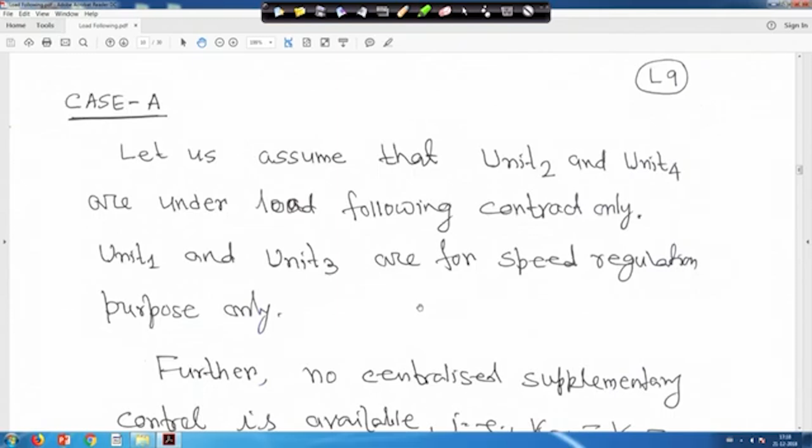So, they will not be part of AGC; that generation will actually change the contracted demand, right. And unit 1 and unit 3 are for speed regulation purpose only. That means there will be no supplementary controller, so Ki1 and Ki2 will be 0, and it will be only speed regulation, that is your delta F by R feedback coming for the governor. So, further, no centralized supplementary control is available, that is Ki1, Ki2 is 0. That is why I told you Ki1, Ki2 is 0.

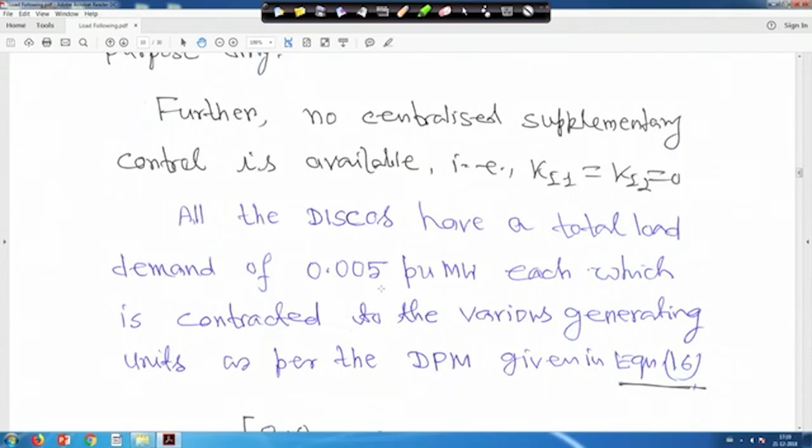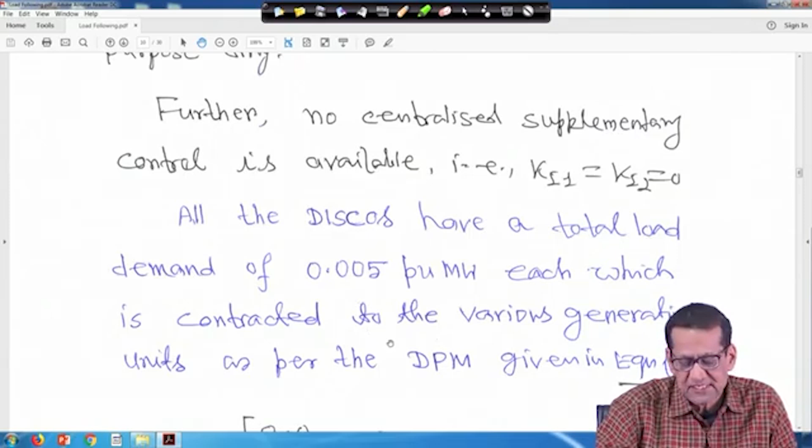So, even with 0.005 per unit megawatt for all the load demanded by DISCOs, that is DISCO 1, DISCO 2, DISCO 3 and DISCO 4, it is contracted to the various generating units as per the DPM. So, this DISCO participation matrix is considered like this. I am writing in short: distribution company means this is D1, this is D2, this is D3 and this is D4. Generation company means G1 instead of GENCOs, G2, G3 and this is G4, right.

So, unit 1 in area 1 is not taking part in load following. That is why all these elements, actually G1 is not generating, in this case it is not GENCO, it is unit 1. Let me just delete this one. This is D1, this is D2, this is D3, actually this is load following. It is unit 1, unit 2, unit 3, unit 4, right. So, these are in area 1, say A1, and these 2 units are in area 2. So, in area 1, generating unit 1 is not taking part in load following, right.

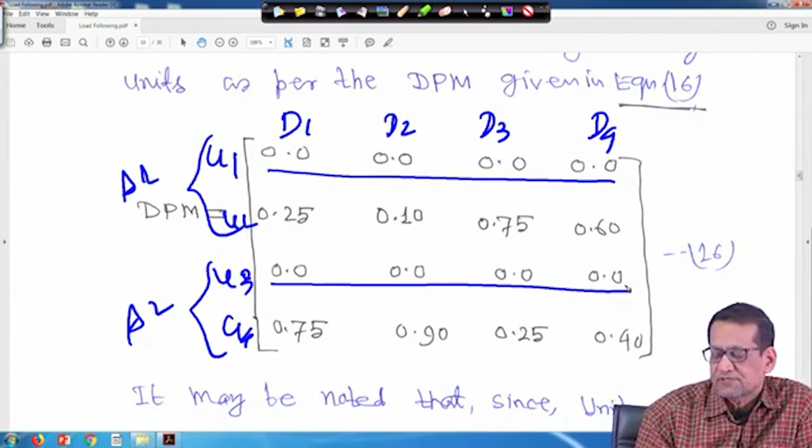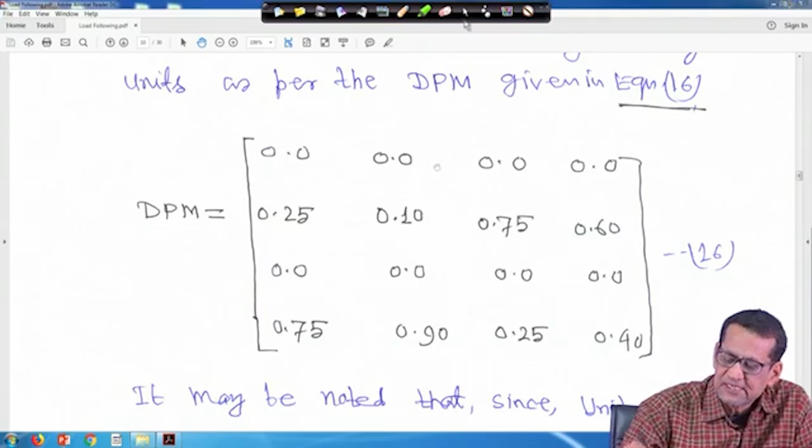That is why all these elements, CPF 11, CPF 12, CPF 13 and CPF 14, are 0. Similarly, unit 3 in area 2 is also not taking part in load following, so CPF 31, CPF 32, CPF 33 and CPF 34 are all 0, right. And then unit 2 is taking part in load following, and unit 4 in area 2 is also taking part in load following, and these are their CPF values, but the column summation should always be 1, right, as I explained. So, this is equation 16. This is the DPM considered for this case, right.

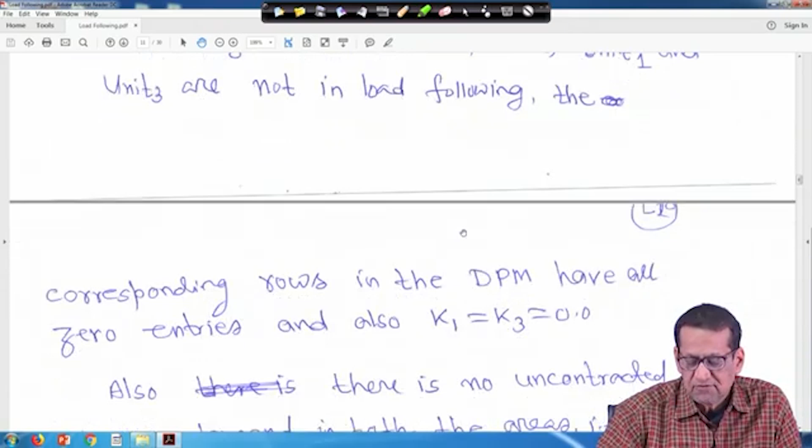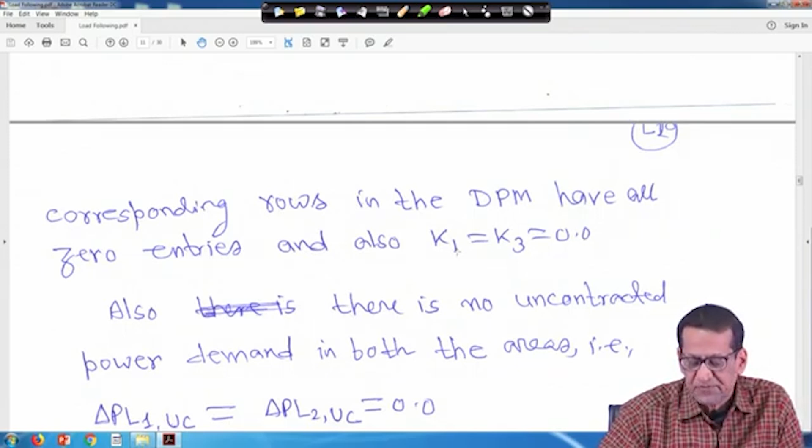It may be noted that since unit 1 and unit 3 are not in load following, the corresponding rows in the DPM have all zero entries, and also K1, K3 is 0, because they are not taking part in load following. The load following controller gain for unit 1 was K1 and for unit 3 was K3, as shown in the block diagram. So, K1 is equal to K3 is equal to 0, right. Also, we are assuming that there is no uncontracted power demand in both the areas. So, delta PL1 UC, that is uncontracted, and delta PL2 UC are equal to 0, right.

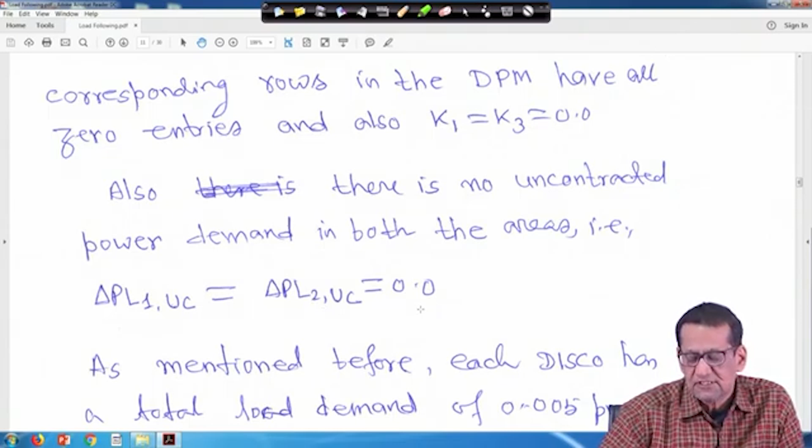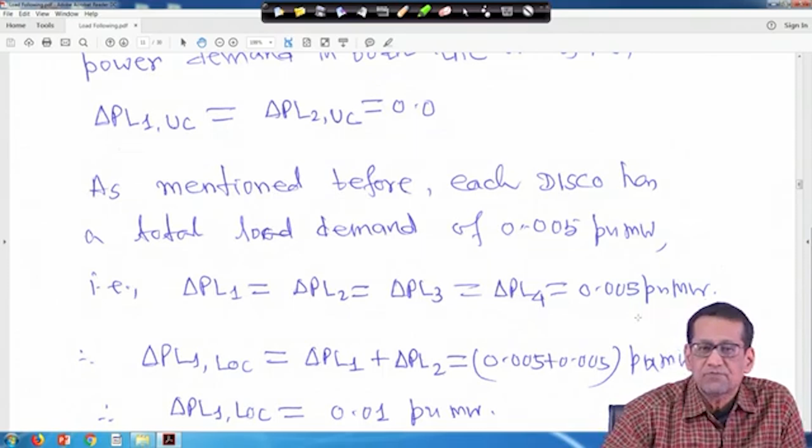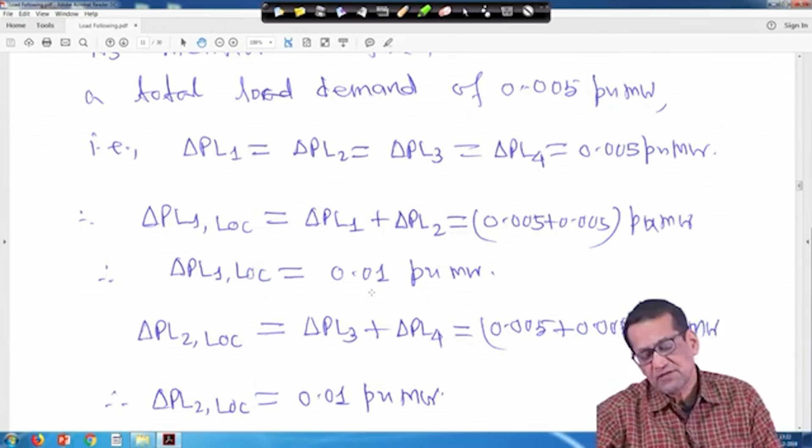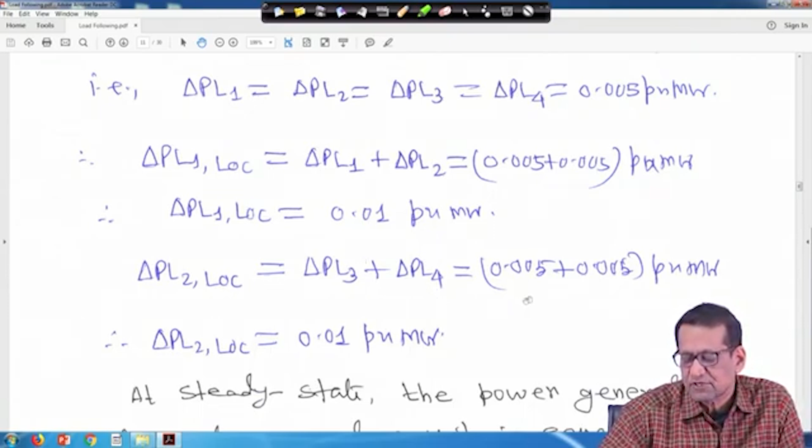As mentioned before, each DISCO has a total load demand of 0.005 per unit megawatt, that is delta PL1 equals delta PL2 equals delta PL3 equals delta PL4 equals 0.005 per unit megawatt, right. And delta PL1 local, same as before, is delta PL1 plus delta PL2, so 0.005 plus 0.005, that is 0.01 per unit megawatt. Similarly, we have taken the same load disturbance for these DISCOs; you can take different ones also and you will get the desired result. So, delta PL2 local equals delta PL3 plus delta PL4, that is 0.01 per unit megawatt, right.

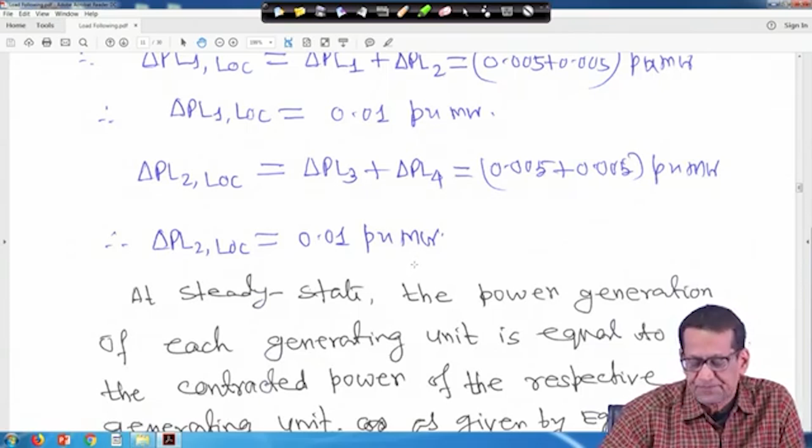Now, at steady state, the power generation of each generating unit is equal to the contracted power of the respective generating unit, as given by equation 3 that we have seen before, right.

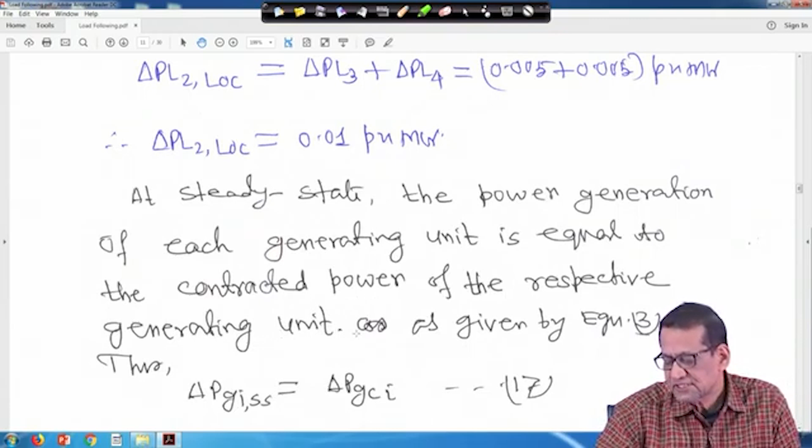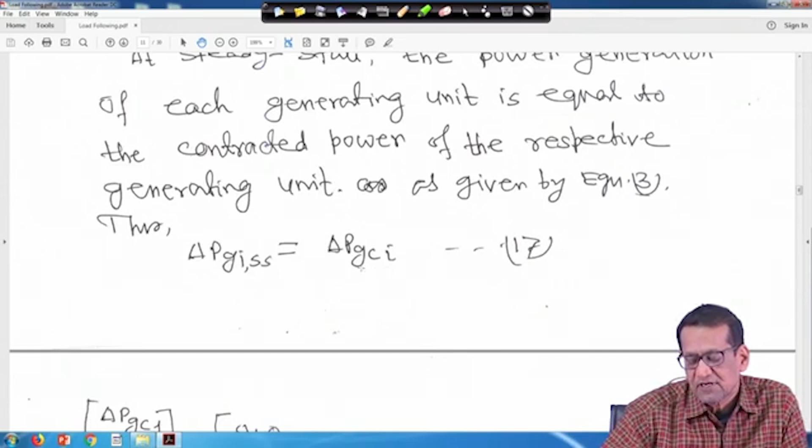So, thus delta PGISS, the steady state power generated by unit I, will be delta PGCI, the contracted power of GENCO unit I. So, this way we can write delta PGC1, delta PGC2, delta PGC3, delta PGC4 is equal to this DPM into delta PL1, delta PL2, delta PL3, delta PL4.

So, if you calculate all, delta PGC1 will be 0 and delta PGC3 will be 0. Delta PGC2 and delta PGC4, these two are contracted demand. For delta PGC2, just multiply this one with delta PL1, delta PL2, PL3 and delta PL4. You will get delta PGC2 equal to 0.0085 per unit megawatt, and delta PGC1 and PGC3 are 0. Similarly, calculating delta PGC4, you will get 0.0115 per unit megawatt.

So, this is actually the steady state contracted power demand. At steady state, delta PGC2 is the total contracted power demand of all the DISCOs that has to be generated by unit 2. So, this is equal to delta PG steady state, because generation will follow the load. So, at steady state this value will come. Similarly, for unit 4 at steady state this value must reach.

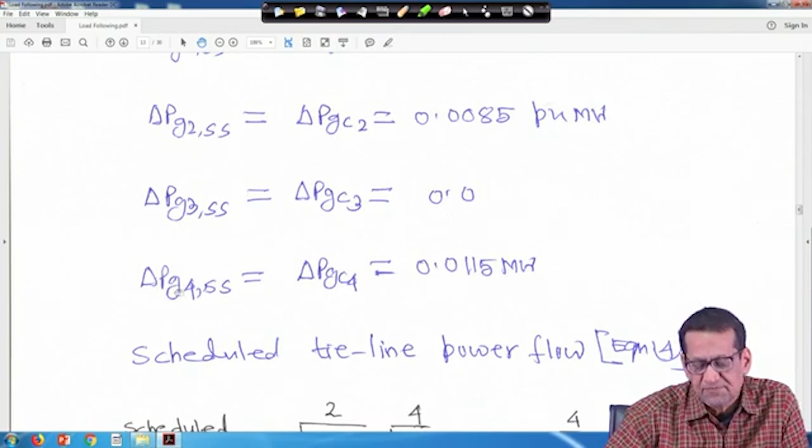Therefore, delta PGC1 was 0. So, at steady state delta PG1 SS will be 0 and delta PG2 SS is 0.0085 megawatt, because that is equal to delta PGC2. Delta PG3 steady state is equal to delta PGC3 is equal to 0, and delta PG4 SS is equal to delta PGC4 is equal to 0.0115 megawatt. So, this is the contracted power.

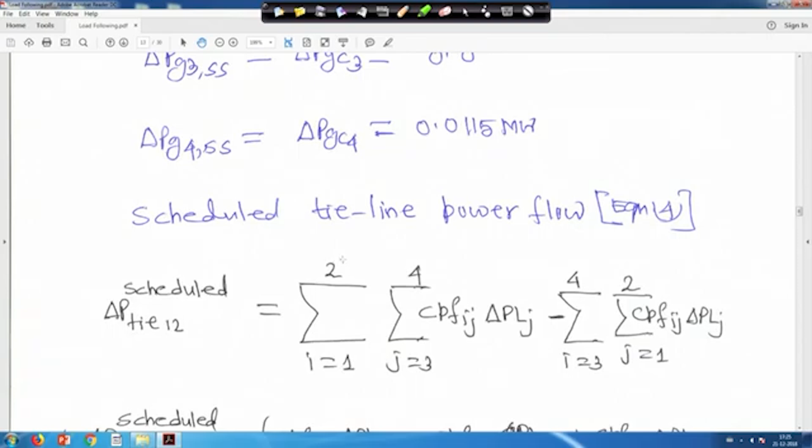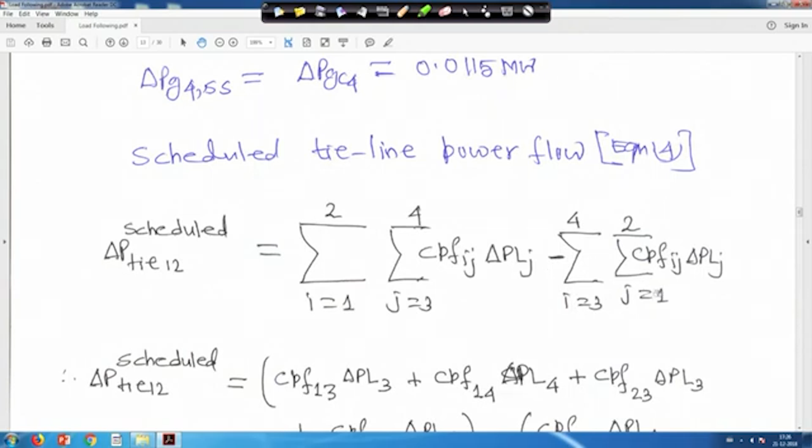Now, the scheduled tie line power flow, that is equation 4: delta P tie 1-2 scheduled equals sigma over I equal to 1 to 2, J equal to 3 to 4, of Cpf IJ delta PLJ, minus sigma over I equal to 3 to 4, J equal to 1 to 2, of Cpf IJ delta PLJ. This is valid only for our system; I did not make the general one, since for 2 or 3 areas there is no need. But I request you, when you go through this, write it down in terms of GENCO and DISCO, and you can easily write it.

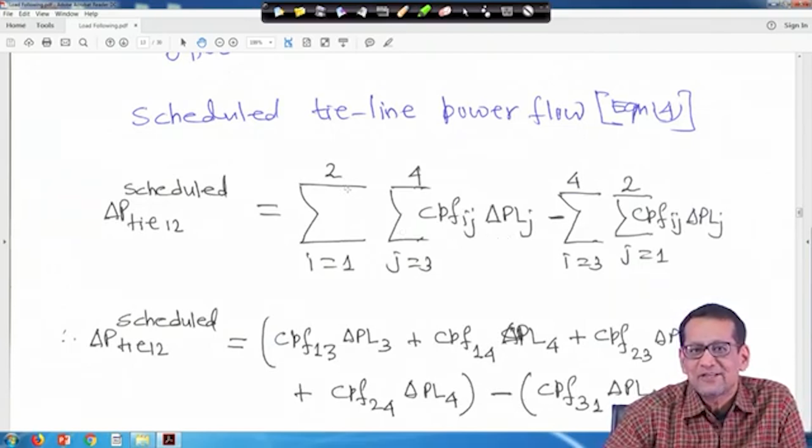So, now delta P tie 1-2 scheduled is equal to Cpf 13 delta PL3 plus Cpf 14 delta PL4 plus Cpf 23 delta PL3 plus Cpf 24 delta PL4, minus in bracket Cpf 31 delta PL1 plus Cpf 32 delta PL2 plus Cpf 41 delta PL1 plus Cpf 42 delta PL2, bracket close. So, Cpf 13 is equal to Cpf 14 is equal to 0, Cpf 23 is 0.75 and Cpf 24 is 0.6. Cpf 31 and Cpf 32 are both zero, from the DPM we have taken, and Cpf 41 is 0.75 and Cpf 42 is 0.9.

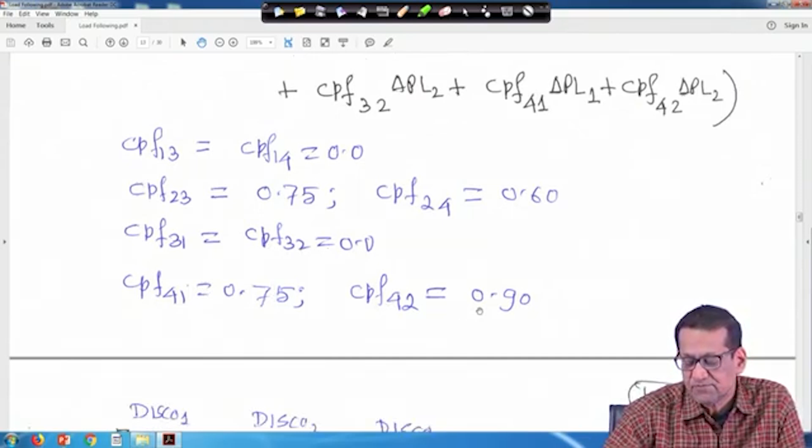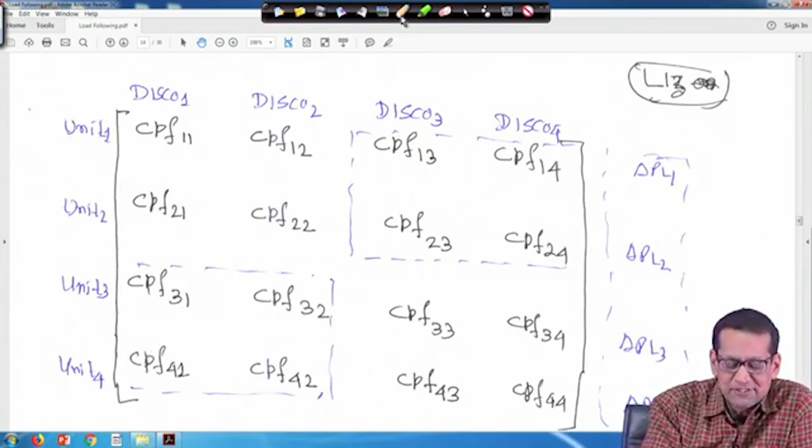Now, regarding this tie power, for a 2 area system you have unit 1, unit 2, unit 3, unit 4, and distribution companies 1, 2, 3 and 4. If you look into the tie line power flow equation, in this block DISCO 1 and DISCO 2 only have contract with the units in their own area. So, this term will not appear in the tie line power flow equation.

Similarly, DISCO 3 and DISCO 4 have unit 3 and unit 4. DISCO 3 and DISCO 4 in area 2 may have contract with only unit 3 and unit 4 in their own area, if any. So, for this kind of thing there will be no scheduled power flow.

For example, previously we took 3 cases for the deregulated system. In the first case we took 0.5, 0.5, 0.5 and 0.5. So, there was no scheduled power, it was 0. The only thing is that between area 1 and area 2 we are taking the direction from 1 to 2.

So, DISCO 3 and DISCO 4 are in area 2, and they have contract with GENCO 1 and GENCO 2 in area 1. So, in the direction of 1 to 2, that is why this term is written first, minus that DISCO 1 and DISCO 2 are trying to draw power from unit 3 and unit 4 of area 2. That is why it is this one minus that one.

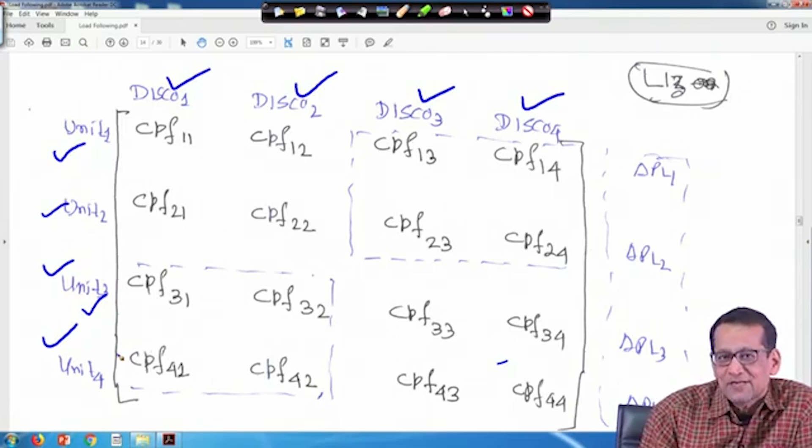So, when you make it, if you isolate all your discos and unit 1 in that own area, then only this matrix will be there and this matrix will be there. So, from that you can write it in the direction from 1 to 2.

So, that is why CPF13 delta PL3 plus CPF14 delta PL4 plus CPF23 delta PL3 plus CPF24 delta PL4 minus, if you look into this, CPF31 delta PL1 plus CPF32 delta PL2 plus CPF41 delta PL1 plus CPF42 delta PL2. So, all these things you add up, this minus bracket all these things, and that is actually tie line power flow in the direction of 1 to 2.

Earlier I have not told, but if you cannot recall those formulas, simply you construct it like this, and easily you can get the power flow either in the direction of 1 2 or in the direction of 2 1. If you want in the direction of 2 1, then this one should come first minus this one. So, this is the idea. Basically when you take CPF13, CPF14, only 2 units are there, so in that case you can easily make it.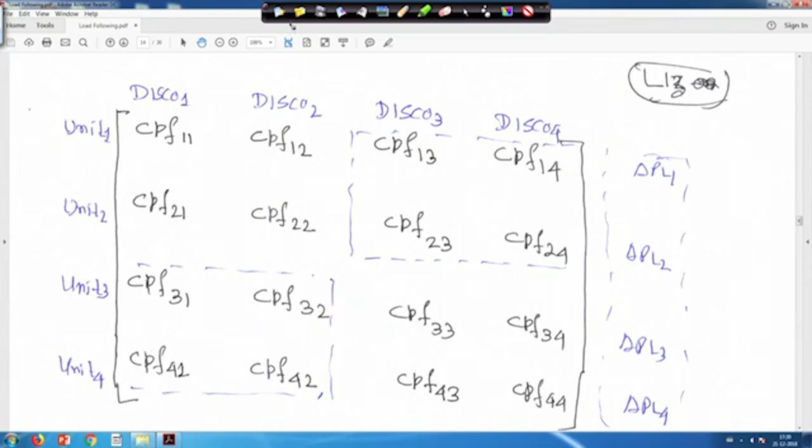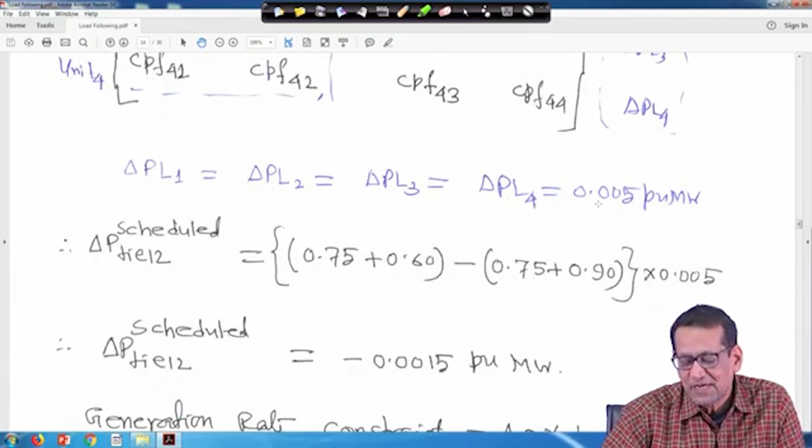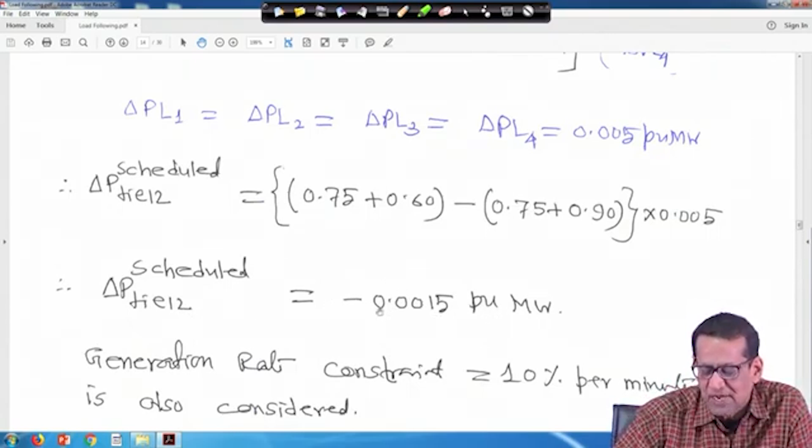So, next is that delta PL1, delta PL2, all these things are given, 0.005 per unit megawatt. So, all these CPF values you substitute here, and all delta PLs are the same, then you will get 0.75 plus 0.6 minus in bracket 0.75 plus 0.9, into 0.005. So, it should come minus 0.0015 per unit megawatt. The scheduled power flow is showing minus, that means the actual direction of the power is from area 2 to area 1.

So, in this case the generation rate constant is taken as 10% per minute. Actually 10% per minute means 0.1 per unit megawatt per minute. So, if you want to make it in seconds, that is 0.1 divided by 60 per unit megawatt per second. So, the generation rate constant value we have taken is 0.1 divided by 60 per unit megawatt per second. That is why 10% per minute is considered.

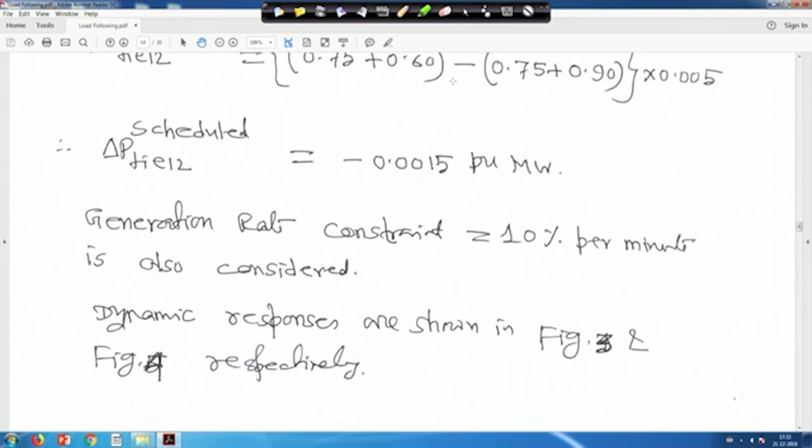Only thing I would like to tell you, all these simulation results are for the purpose of our understanding. Actually the code was written, not directly through Simulink; data were generated, then plotted in the MATLAB environment. So, now dynamic responses are shown in figure 3 and 4 respectively. We will go one by one.

So, if you see the frequency deviation, at steady state it is 0. Although a 150 second plot was shown, in less than 50 seconds it will be somewhere around that. Around 25-26 seconds it is more or less settled. Similarly, frequency of area 2 is also settling; we have given 150, but much before that it is settling.

But if you do not consider GRC, then peak deviation also will be less. Here it is minus 0.08 hertz approximately for frequency 1. Similarly, for area 2 also minus 0.08 hertz peak deviation, but without GRC it will be very less, maybe minus 0.023 or 0.024 hertz or even less. So, this is frequency deviation, and at steady state, as desired, the deviation is 0.

So, next is the tie line power, actual and error. The actual power is minus 0.0015; the scale is 10 to the power minus 3, and it is coming minus 0.0015 per unit megawatt. At steady state the delta P tie 1-2 error will be 0, because actual will match the scheduled value. The dash line is the delta P tie 1-2 error, and at steady state it is becoming 0, but oscillations are there.

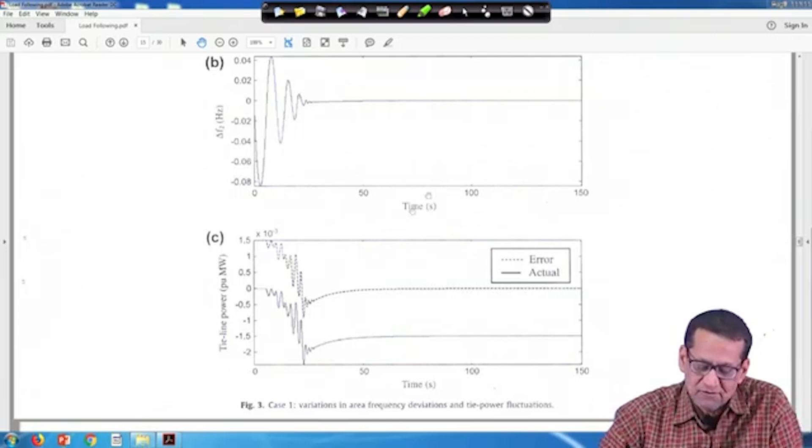This is due to your generation rate constant, and if you look into these two curves, both are in the same shape, only their scale has shifted, because delta P tie error is equal to actual minus schedule, right. So, just the scale has shifted, otherwise their nature is totally identical, right. So, this is my frequency and tie power. Next we will see the generation.

Now, if we come to the generation, one interesting point is there, I will come to that. First see delta Pg1 steady state, right. So, delta Pg1 is the dashed one. It has come to 0, because unit 1 was not in load following, and also we did not put any load frequency controller, and delta Pg2, right, was in the load following, and it is reaching this steady state value, right. The exact values are there on top, just let me see it.

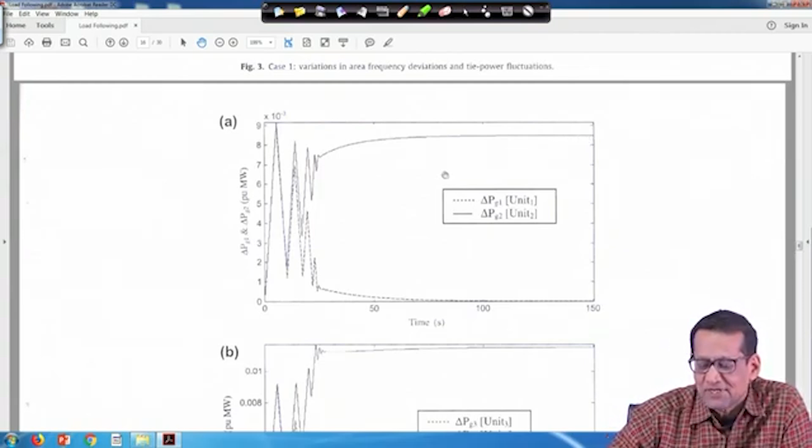I cannot recall these things, I think it is 0.0085, right. Delta Pg2 has 0.0085 and delta Pg4 0.0115. So, here it is actually going to the steady state, right. At steady state this is going to 0.0085, that is delta Pg2, because it was in the load following, because contracted load demand was 0.0085. So, generation chases the load and this is also more or less settling at this time, right.

It is less than 100. So, actually all are supposed to settle; because of this plotting and the units, that is why perhaps it appears that here it has settled in 20 or 30 seconds for frequency and tie power, right, but still it is not exactly 0, right. So, some difference is there, that is why it is depending on the scale. That is why it appears that it is still going, but the value is very negligible, the scale is 10 to the minus 3, right. So, delta Pg1 of unit 1 is going to 0 and delta Pg2 is going to this value, right.

So, similarly, delta Pg3 and Pg4 are plotted as well. Delta Pg3 here also is going to 0, because at steady state it was 0, and delta Pg4 is going to steady state, I think 0.0115, right. So, that is actually generated by unit 4, right. So, the steady state value is matching.

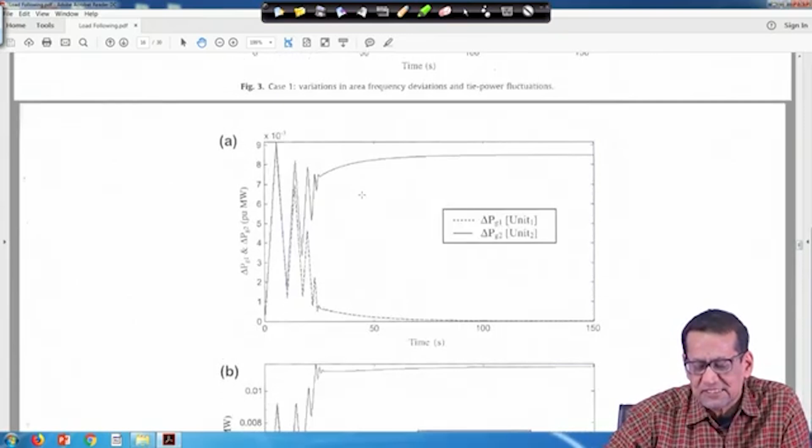Now, the interesting point is that if you look into the generation responses initially, right, it is actually a ramp increase or ramp decrease, right. I told you this when we were discussing the generation rate constant, that delta Pg for the ith unit at k is equal to delta Pg for the ith unit at k minus 1, plus or minus r into delta t. In the simulation, I told you that we have taken r as 10% per minute. So, that is 0.1 divided by 60 per unit megawatt per second, right. So, every time the generation rate was checked, right.

And whenever you see ramp type responses, right, at that time you will find the generation limit was violated. So, when it is a ramp increase, at that time delta Pgi dot, in general, was greater than 0. That is why the plus sign: delta Pgi k is equal to delta Pgi k minus 1 plus r delta t, right. First thing is delta Pgi dot was greater than 0, and second, before that, the absolute value of this one was greater than r, right.

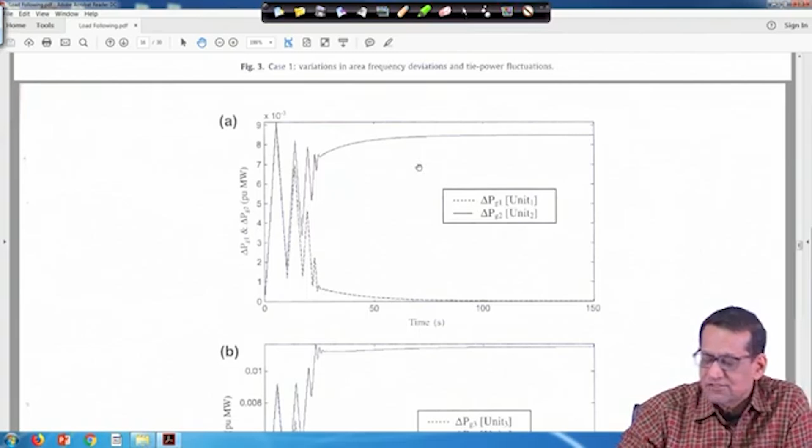So, that is the reason for the GRC effect. This increase or decrease happens only when some oscillations are there; at that point you will find GRC is not violated. So, this is why it looks like a ramp increase or ramp decrease of the generation. So, this is for case 1.

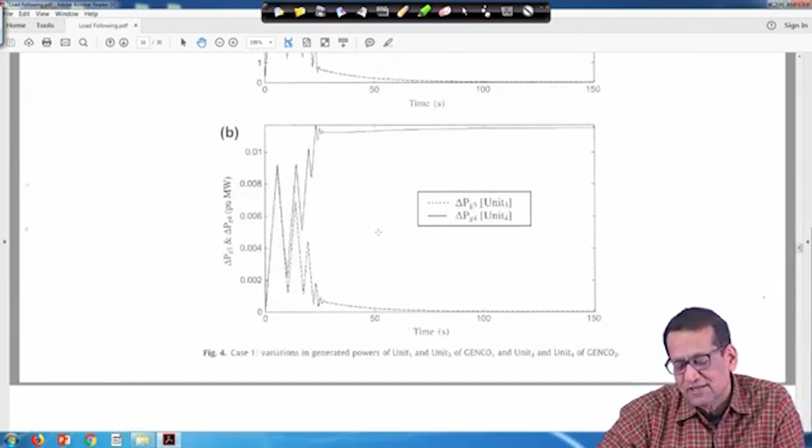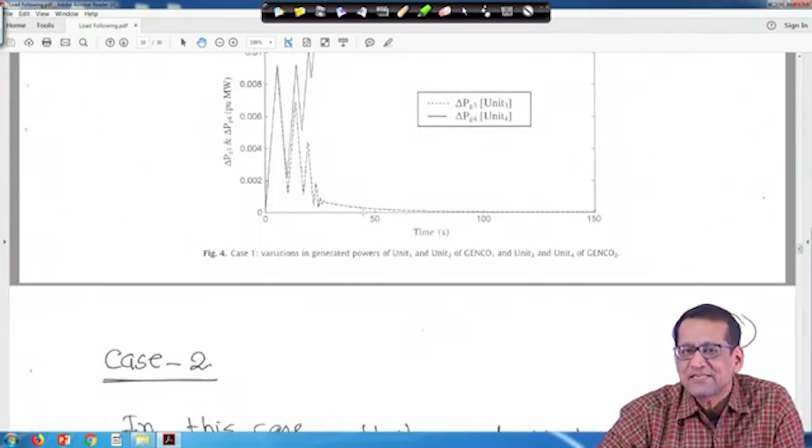Now, case 2. The first one I have written as case A; make it case 1. So, this is case 2. In this case, unit 1 and unit 3 are under AGC only, while unit 2 and unit 4 are under load following only. So, the DPM remains the same as given by equation 16 in case 1. The first one I have written as case A, so better you make it case 1.

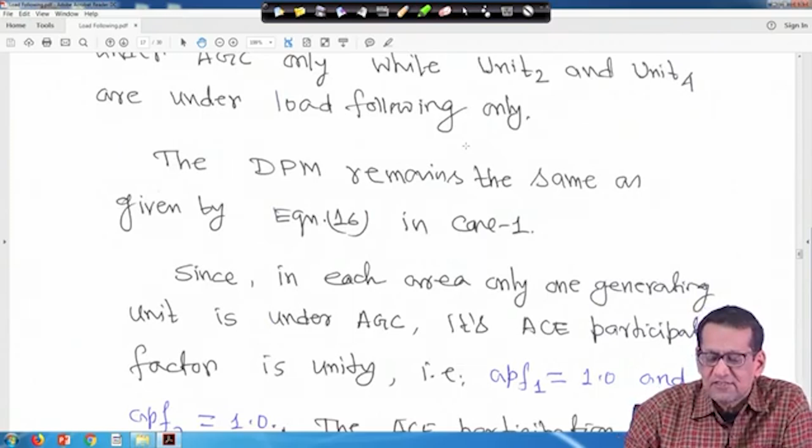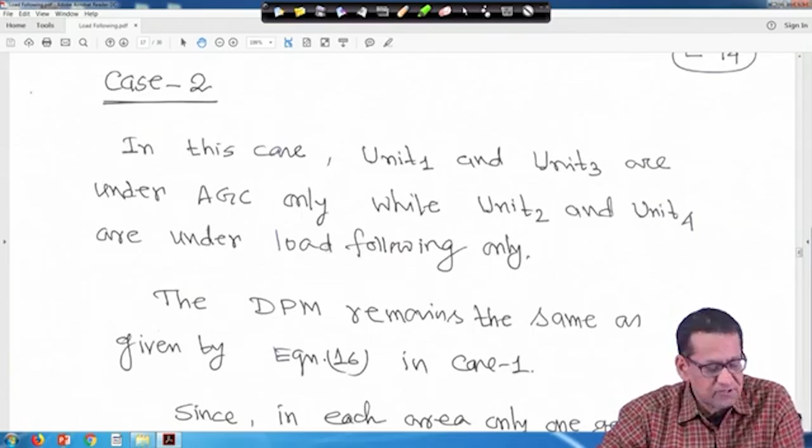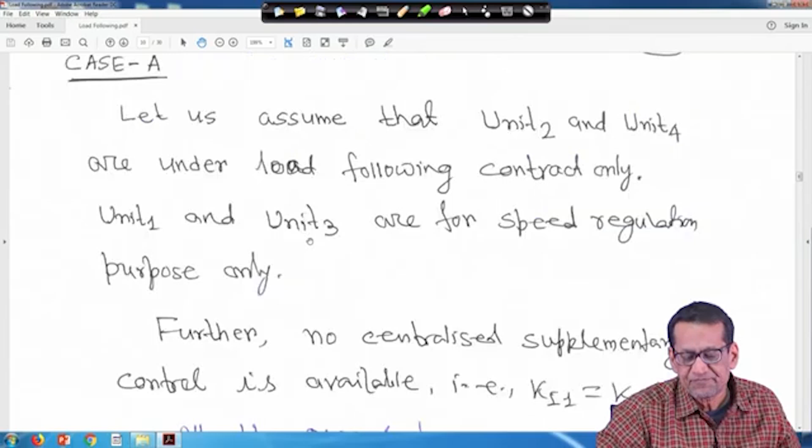I will go to the block diagram once again, since in this case unit 1 and unit 3 are under AGC only, while unit 2 and unit 4 are under load following only, so that it will be easy for you to realize this. Just hold on, let me reduce the size. So, this is my unit 1 and this is my unit 3. If these two are in AGC, then unit 2 is under load following, and unit 4 is under load following.

Unit 1 under AGC only means that APF1 is equal to 1.0, and APF2 will be 0.0. So, that term should not be there. Here K1 has to be 0, because unit 1 is not under load following, so this also should not be there, only the simple unit the way we have done it before. And unit 2 is under load following, so K2 will be there, but APF2 is 0, so this should not be there.

Similarly, unit 3 is under AGC, which means APF3 should be 1.0, and this value should be 0. Here K3 should be 0 as it is under AGC, meaning this load following controller block should not be there, but in this case it will be there, since it is under load following. So, that way you can generate so many cases.

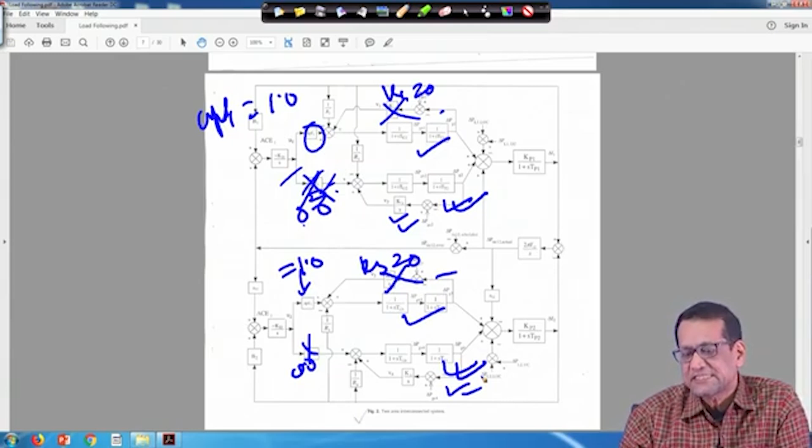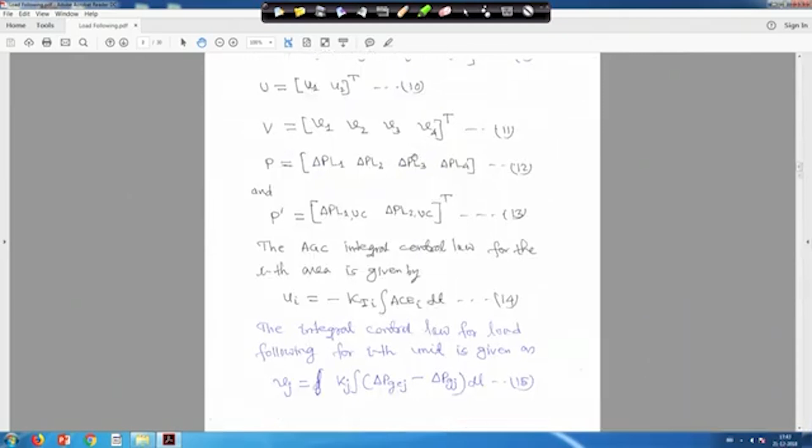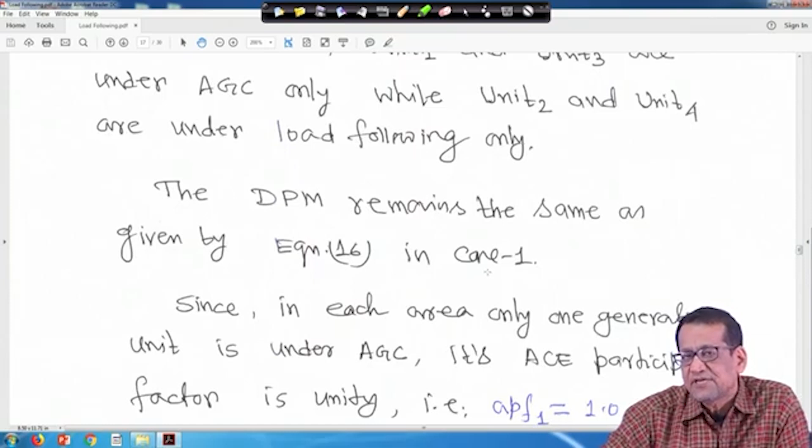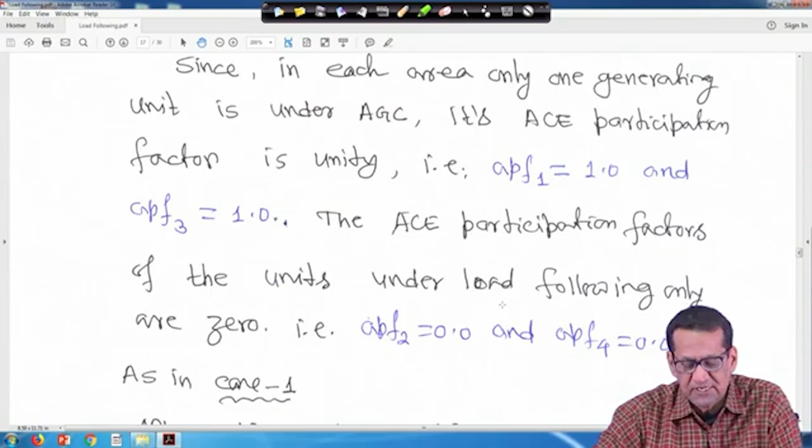Therefore, let me go back to case 2. In this case, units 1 and 3 are under AGC, and unit 2 and unit 4 are under load following only. So, the DPM, the disco participation matrix, remains the same as in equation 16. In each area only one generating unit is under AGC, so its ACE participation factor is unity. APF1 will be 1.0 and APF3 will be 1.0, while the participation factors of the units under load following only are 0, so APF2 is 0 and APF4 is 0.

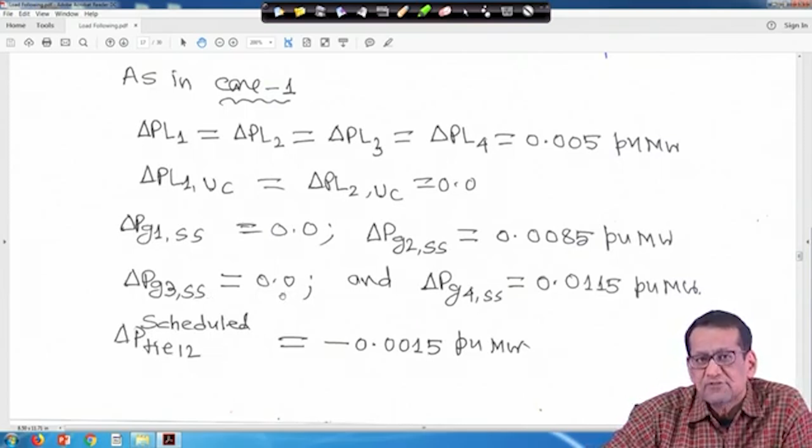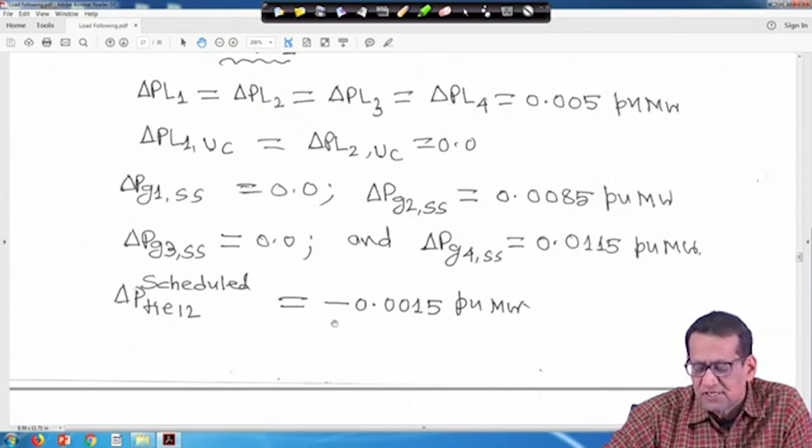As in case 1, the same data is taken: delta PL1 equals delta PL2 equals delta PL3 equals delta PL4, that is 0.005 per unit megawatt, and there is no uncontracted demand, so delta PL1 UC equals delta PL2 UC equals 0.0. Therefore, at steady state, delta PG1 SS will be 0.0 and delta PG2 SS 0.0085 per unit megawatt, because the DPM remains the same. Delta PG3 SS will be 0.0 and delta PG4 SS will be 0.0115 per unit megawatt, and delta P tie 12 scheduled is minus 0.0015 per unit megawatt.